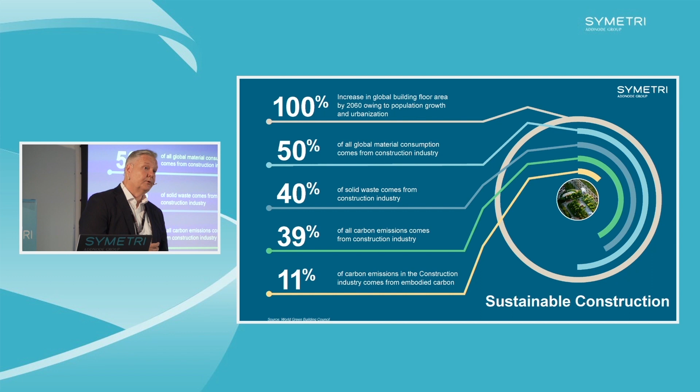So we are focusing on the two last ones, meaning that 39% of carbon emissions come from the industry today. We need to start somewhere. So we have said that we would like to focus on the 11% embodied carbon to start off with, and bring that into the early design phase as much as possible. Nowadays, they used to do that in the last part of the design process and when you start building the projects. But we would like to consider embodied carbon as early as possible. So it's time to act.

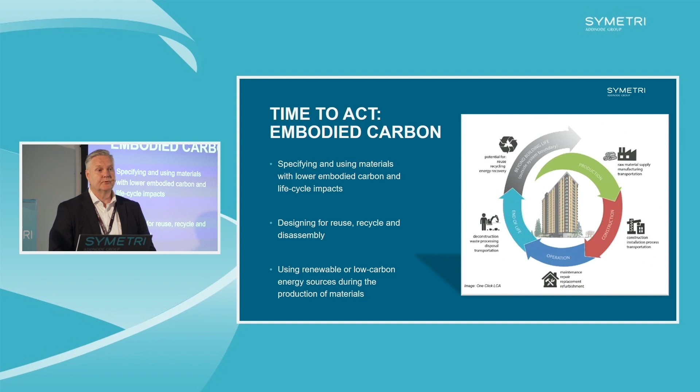We would like to be able to use materials with as low embodied carbon as possible throughout the life cycle. We would like to focus on reuse, recycle, and disassembly as well. We would like to choose materials that have low emissions when it comes to production. For instance, there's more emission when producing materials in Norway versus Iceland, because they're using low energy resources to produce things. So it's things we need to look at.

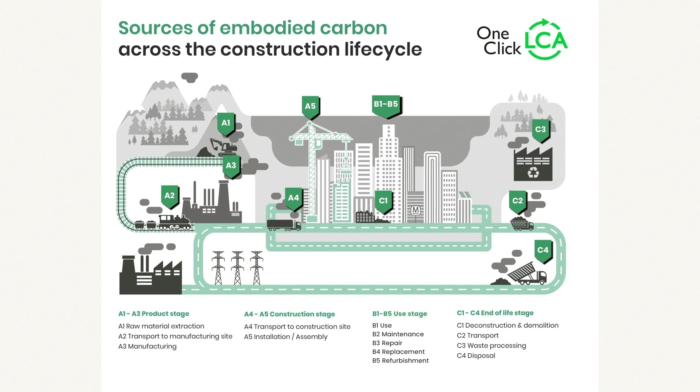So this is the life cycle of embodied carbon emission, everything from A1 to C4, the whole life cycle of a building. The first part is for us to focus on what we have defined as A1 to A3, meaning how much embodied carbon is produced by producing this product, having this material in the project. And of course, later on, we should also consider transport. There are standard values for transport within each country. And we also need to consider A5 when it comes to assembling or building the project on site. But A1 to A3 is our main focus in our solution.

Just to let you know a little bit about our initiatives today. We have 4 main areas we're working by. That's process efficiency. You saw some part of that today with RKD Architects, providing solutions within Revit, Civil 3D, the cloud solution, to make you work more efficiently, removing boring, repetitive tasks. That's one part. Benefit of data, making sure that your BIM data are secure, stored in the right areas, and you have the possibility to maintain that data throughout the life cycle of your project.

Learning is a third part. Of course, having invested in different solutions, we need to make sure that you adapt them in the correct way and leverage the cost you have put into them. And the last part is sustainability, to help you as users out there to make the right selection of different materials and products that you have available around you.

And that brings me into the initiative that Shivani touched on earlier today. To be able to do that in the most efficient way, we need to look at the life cycle. So being Symetri, we are so fortunate that we have the AEC business, but we also have the manufacturing business. So we could be in both places. The Naviate Zero solution is going to be released summer 2023, we said.

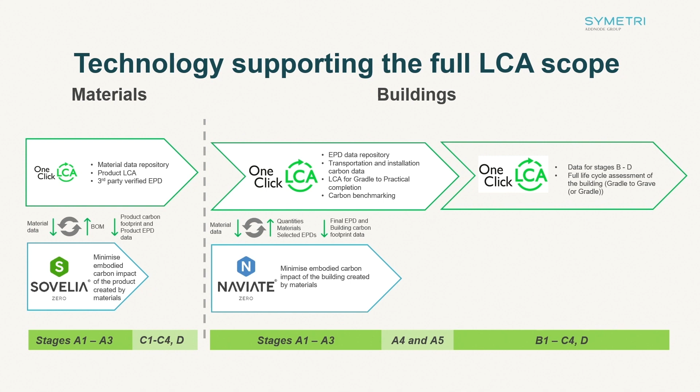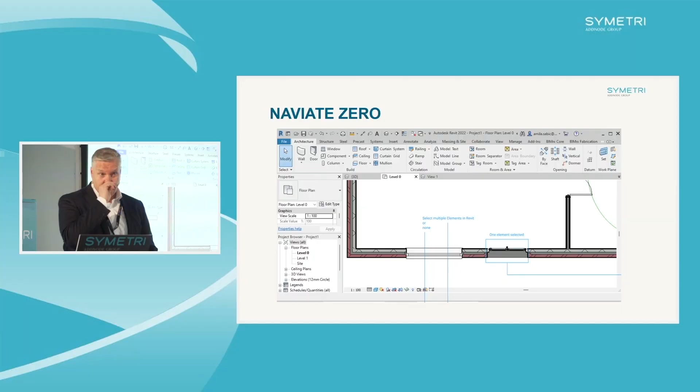So that's Naviate Zero. This is going to be a little bit techy. I'm going to show you some screenshots, some mock-ups, and walk you through the different capabilities we would like to have in Naviate Zero. And I promise you that at the end of my presentation today, I got a video from one of the developers this week. So you will have a sneak peek into how far we have come today, preferably having a release now, summer 23.

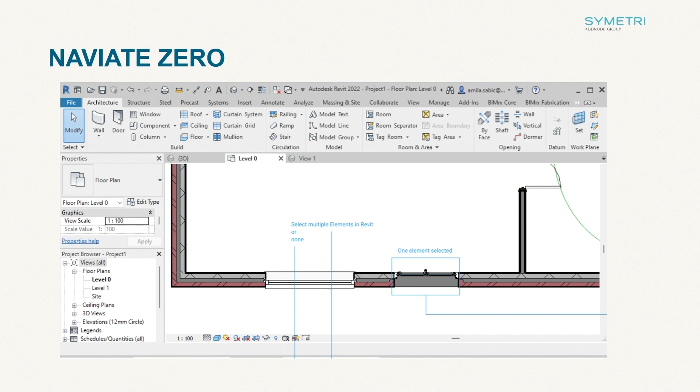So imagine you are working within Revit. You're starting sketching your model, putting up the walls, the floors, the windows, etc. And you would like to start considering embodied carbon in your project. You can do that by selecting things, or you can say give me my whole model, and we'll start off from there. So there are two approaches: selecting one or several elements, or give me the whole model I'm working with.

Of course, you need to consider some project settings. We need to know which country you are working in. Are you working in the UK, Ireland, the Nordics, whatever? We also need to consider the units. That's important when you're doing the calculation to provide you with a GWP, global warming potential. That's an outcome of the Naviate Zero solution. That's the setup before you dive into the dialogue itself.

So have in mind, Naviate Zero is the first approach around sustainability and embodied carbon, but most likely you will see elements of sustainability within each and every discipline. For instance, in architecture, we can look at refurbishment. You're demolishing something and building something new. Could you take some of the materials in the old building and put them into the new building? For structure, optimize reinforcement, minimize waste, for instance. So several things you will probably see coming out from Symetri in the different technologies.

That brings me to the main dialogue. On the left side, you have the model: all objects, material elements you have in your project. Windows, doors, floors, whatever. On the right side, you have the EPD repository, meaning that we are live connecting to the EPD repository when it comes to EPDs and generic values for each and every country. And I will walk you through the different steps and capabilities within the product, and you will see the live demo in the video at the end.

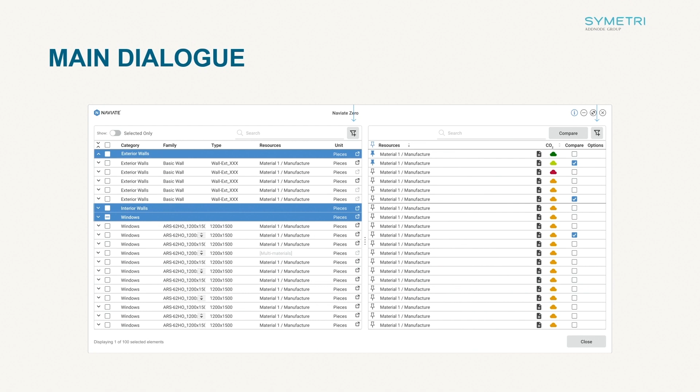So while clicking in the left side, windows, floors, doors, or whatever, you will see that the right side is changing instantly, because we have mapped everything in the repository with Revit materials. So it will change according to what you're clicking on. To optimize that part, we need to implement some filtering and searching, because if you have chosen the whole model, it's going to be a lot here. You can do that by leveraging the Naviate Accelerate product we have, choosing live selection or filter, as a start off. If not, you need to do that in the product.

And it's important also to focus on the usability, the user experience. The goal is that you don't need to have a PhD in sustainability or environmental declarations or anything else. It should be easy so everybody in your company can leverage Naviate Zero and start focusing on embodied carbon.

So, searching. We have implemented, as for now, things could change, of course, being able to sort by category, whether by materials or objects or families in Revit, and we need to be able to sort down on subcategories, maybe types, etc. That's one important part to work most efficiently in the product. There are some elements here also. I'm not sure how we're going forward with that, but it's more or less telling you if this material has an EPD or a value or not. And you can remove the EPD or add a new EPD, etc. That's the goal.

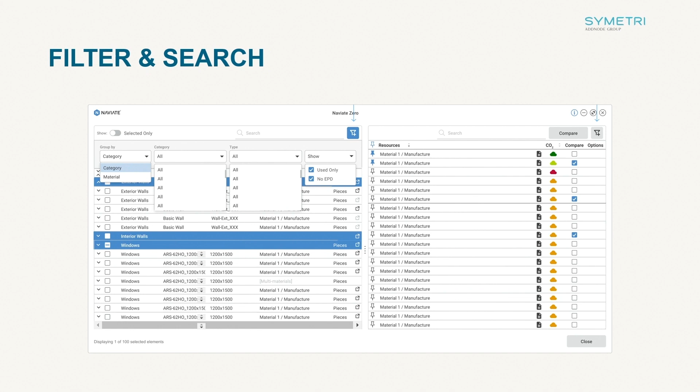So, as you see from this one of choosing categories, if you go down to material, you can see that now pops up bricks, you have plaster, glass, etc. So you have two different approaches if you're going to work with objects from families or materials and such.

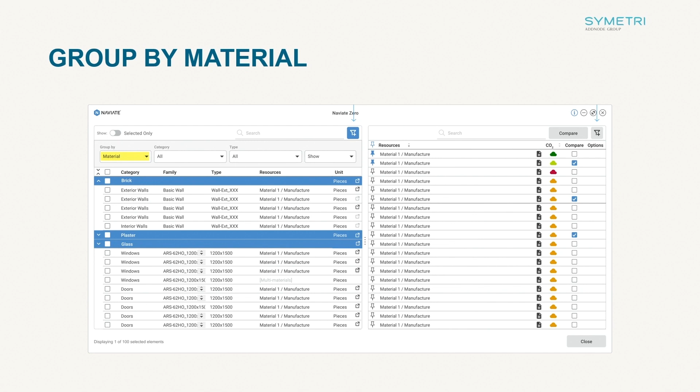Further on, you can see that we also have something called multi-materials. So we are detecting and exposing the different layers within a window, for instance. You have the finishes, you have the glazing, you have the panel, etc. So we can start working with actual EPDs within different families as well that have multiple different layers of materials.

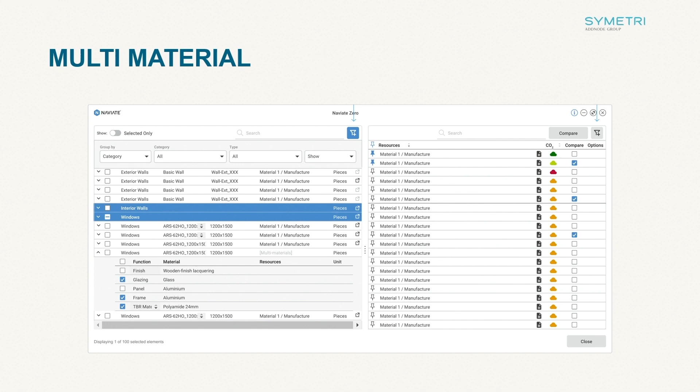Then it's time to go on the left side, or no, the right side for you. Looking at the EPDs. So this is live data, constantly updated from our side, depending on all the new EPDs that come around in the different countries throughout the globe. So as soon as some new ones are being published out there, we will instantly have those available in our repository. So it's a live link from Revit through the EPD repository. And as I said, it's changing according to what you are clicking on the left side.

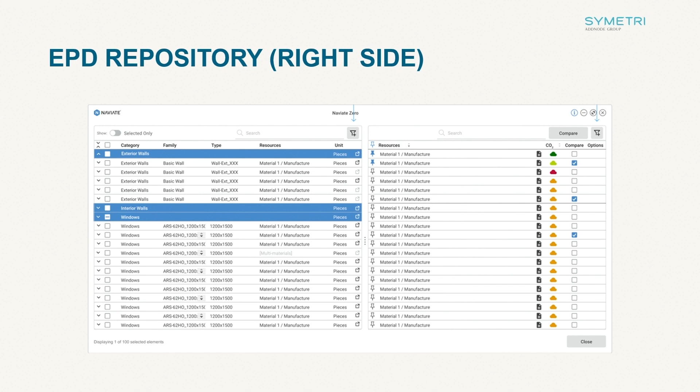So you probably need to start sorting and remove something. So you need to consider different data sources: EU data, UK data, and you can do a combination of those. You can choose several, because sometimes you need materials or products coming from other places and probably not within the country as such. You can sort it by type of material you would like to work with. And, depending on the project, what you're allowed to or not allowed to, you can either work with generic values set for UK or Ireland, or you can even start working with actual EPDs for the different materials and products you are designing.

You could also start by filtering. Give me the most sustainable materials and products, or you can click 2 or 3 of those and give me a view of which one I can choose between. You have the possibility to favorite some of the products and materials, so it remembers that for the next project. And your favorites will always be on top. So next project, you will see the same. So you don't have to look for those EPDs or the values you were working with on your previous project. And units are important, as I said, as well, to do the right GWP calculation.

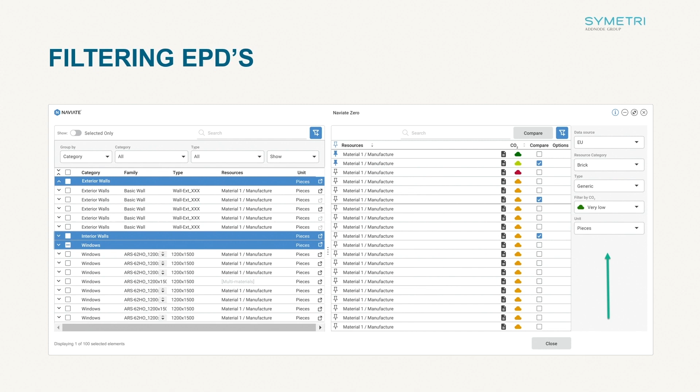And of course, seeing this large list, you would like to compare. I think the text is kind of small there, but you should be able to compare different EPDs or values with each other. So it can look like this. Compare these 3 EPDs when it comes to the carbon emission, the embodied carbon. And then you can instantly, in the comparison, also click Apply. And by clicking Apply, you will write data down to these elements you've chosen on the left side. We are not writing the data on the actual materials itself or the family, but we are using the extensible storage in Revit to provide that data. But they are interlinked, so connected.

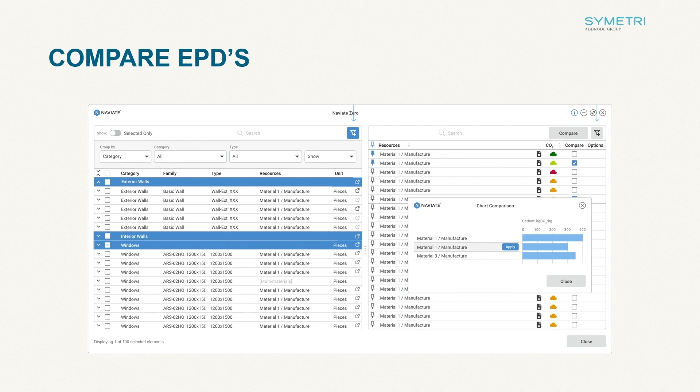So, easy to choose your family or choose your material on the left side and click the appropriate material you would like to use on the right side and click Apply. And it says EPD has been applied successfully to your materials. Yes.

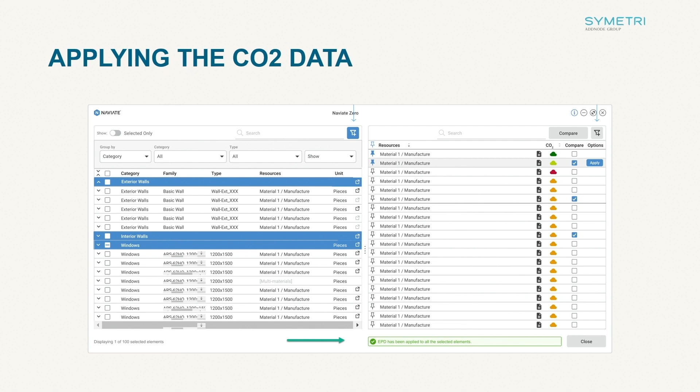That's how it is. But of course, we have some management, C-level people that would like to see the data. How is your project doing? I don't really understand the data you're providing me. So you need some visualizations, of course. Both for yourself, but also for others, to see which category or which material is impacting this project most. And probably that's the first part you need to look into. How can I optimize this carbon emission for material A or category B, whatever. So it's 2 different visualizations.

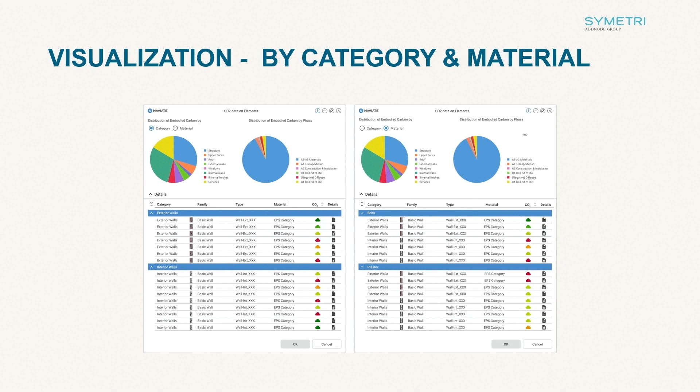And hopefully in the future, we will also be able to provide you with a 3D model showing the different areas, if it's red, green, or yellow, a 3D view. It's easier to look at a 3D model rather than at all the different numbers in a project. So that brings me to this Naviate Zero MVP. So it will have capabilities, meaning that you should be able to get generic values for the EPDs in early design.

You should be able to get actual EPDs, not just the values, if it makes sense and you are allowed to do that, of course. You would like Naviate Zero to help you choose, meaning it will suggest based on previous projects, this is your favorites, your project is in UK or in Ireland or in Nordics as well. So we will try to optimize and propose some solutions for you going forward.

And maybe in the near future we can add some AI into this as well and try to understand what you would like to achieve in using Naviate Zero. Of course, you would like to always compare, to be able to take the right decisions. And you should be able to visualize the data. That's the MVP, minimal viable product, to be out there summer '23.

I got a lot of questions because we are partnering with One-Click LCA, and they have solutions as well within the Revit environment. So I would like to point out some elements comparing Zero with the One-Click LCA Revit integration. One important part is that we do the summarization of the numbers, the CO2 emission, directly in Revit. You're not able to do that with the Revit integration.

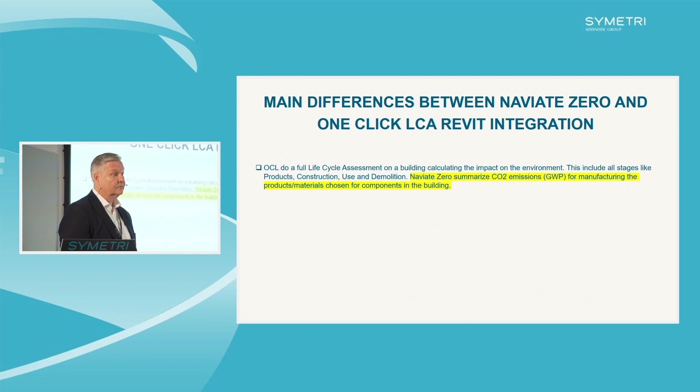We don't need a One-Click LCA license, meaning that you can provide Naviate Zero for a lot of users internally, and you can be paying for 1, 2, 3 seats on One-Click LCA going forward to do the actual full life cycle assessment in the projects.

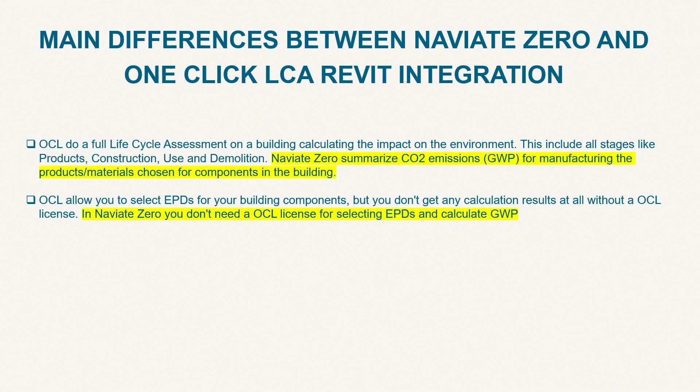You are transferring the data out of Revit, as I was talking about in the beginning. When you start iterating and optimizing your design based on the embodied carbon emission, you would like to do that in your design platform. No export, import, export, import again. So we are keeping all the data within Revit. With One-Click, you need to export. And it's a one-time job, and you need to redo it next time, etc.

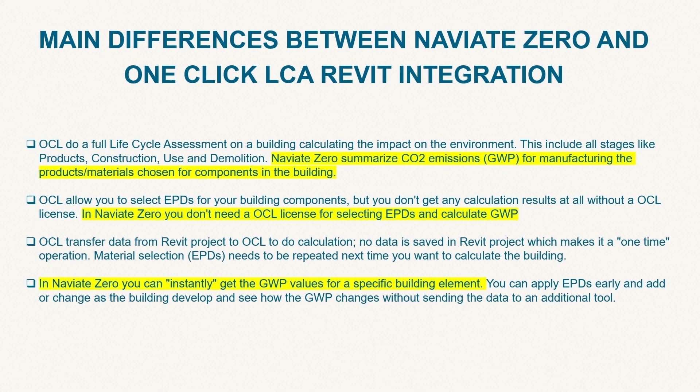And you can instantly get the impact by choosing A, B, or C on the EPDs or the values directly in the model. And probably in the future, you will have a meter telling you you're slightly above or slightly below the setup or the demands you have for your projects.

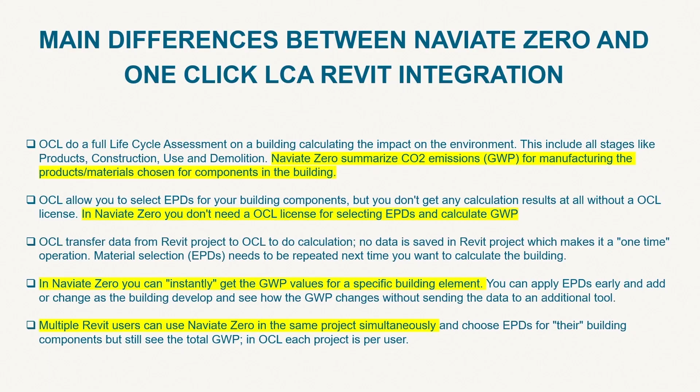And one great advantage using Naviate Zero is that you can have multiple users at the same time in the same project adding data. In One-Click LCA, it's just one. So for all the different disciplines, you can feed your model with all the EPD data you need going forward. That's the comparison between One-Click and Naviate Zero.

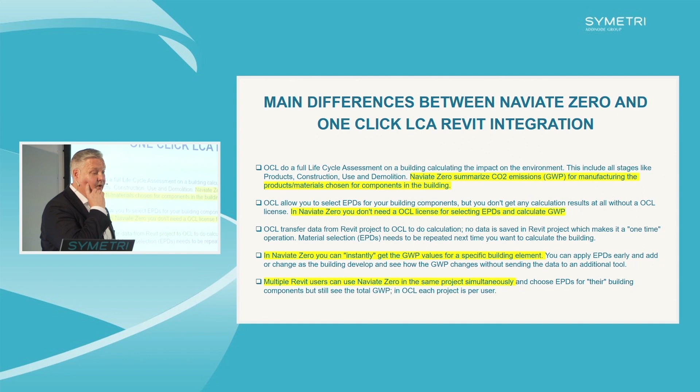Of course, we didn't fit all our thoughts or capabilities in the first release, so we have a roadmap already, and I will share it with you as well. We would like to extend the visualization, the CO2 impact per element or type, and rank it high and low in the project. We would like to, as I said, put some AI behind this and optimize the way you are working with EPDs. We would like to work with different design options, so compare design A with design B. Don't mix it up with Revit design options, that's not the same, but implement such capabilities within Naviate Zero.

Another thing we haven't talked so much about is that there's always a cost behind choosing this material or this product. In the future, we would like to see the footprint versus cost as well. So you need to balance the cost with the footprint. That's important. And as I said, having the meter always showing you the current state of the model.

Of course, the industry is working with IFC, so you would like to export your data together with an IFC file to provide it into the project, moving from design into construction, etc. And of course, you would like to reuse the data you have done in your model and start off in One-Click LCA with everything you have done in Revit. That's the goal, or that's our thoughts.

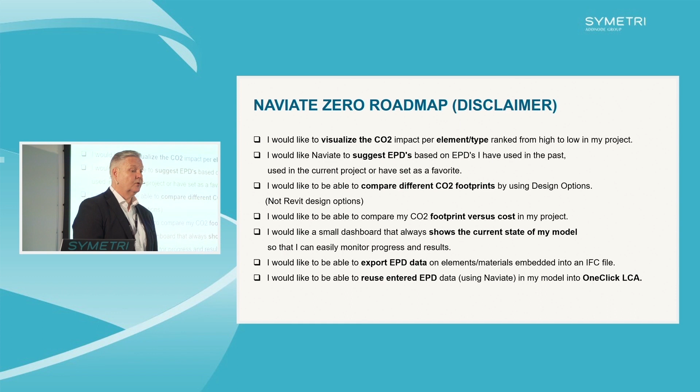We are working with those ideas. We are picking the most voted ideas and putting them into development. We have a development cycle of 3 months, meaning every 3 months we can have an actual release. So if your idea is voted up, it takes 3 months from development to market, 4 times a year. So that's how you can impact the different products you're using going forward.

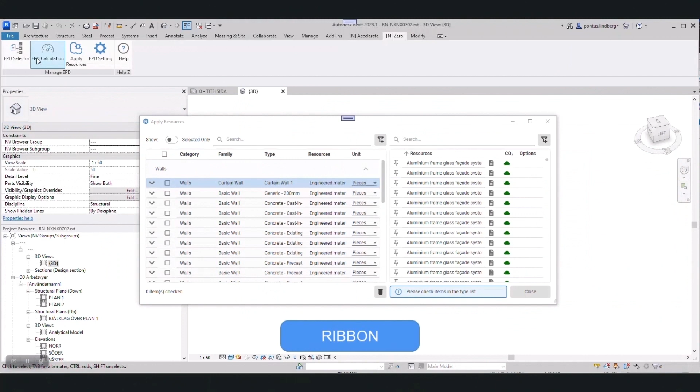Okay, now it's time for the video. A sneak peek from the developer, created this week, showing the product in action.